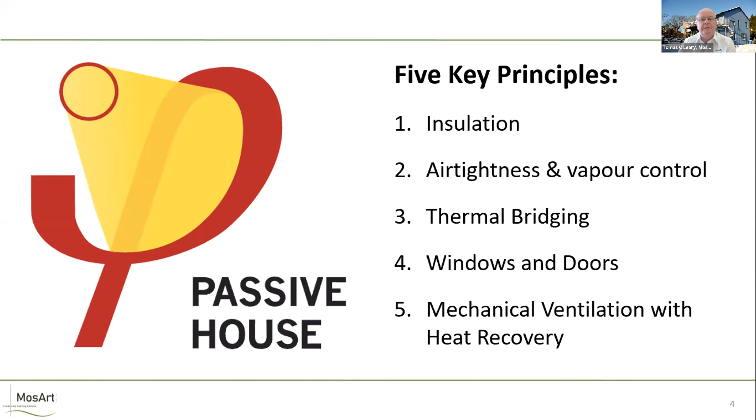So the thing I love about Passive House is the simplicity of it, quite honestly, and the fact that Passive House does the simple things extremely well. And we often talk about the 5 principles of Passive House, being insulation, air tightness and vapor control, thermal bridging, windows, and heat recovery ventilation. And really those 5 principles, if you carry those with you through your building design, whether it's new build or retrofit, whether it's residential or commercial, it'll never really set you that far wrong. And I suppose they are the bedrock of everything we do and all the projects that we work on.

So essentially, I was in Tralee. Hans Eek was talking about Passive House, and he was talking about triple glazed windows and crazy levels of air tightness that we'd never imagined before, and amazing U values. And I was just completely hooked. Basically from that day on, I just said to myself, right, I want to dedicate all my energies to this. It was like an epiphany moment for me, and something that I never looked back on. But the problem was I had absolutely no clue what I was doing, literally no clue.

I trained in UCD as a landscape architect, and I had no background in building physics. I had no background really in education. I had no background in energy modeling, thermal bridging, vapor movement, all of that kind of stuff. But nevertheless, I just jumped in with both feet and said, right, let's give it a go. There's plenty of experts out there that I can lean on. And I'll come back to that image in a little while. But I suppose the main message I want to get across this evening is, if somebody with my background can actually deliver a certified Passive House nearly 20 years ago, then really architecture technologists have no excuse nowadays, I would say.

So I was looking back over an archive of old photographs, and this is my wife, Mairead, who's on the line this evening, and our 3 children. And so we literally sold our house. We went to a conference. I came home. I was talking about Passive House. I said to my wife, Mairead, we got to build one. Can we sell our house? And she said to me, hold on a second, you want to sell our family home to build an experimental house? And I said, yeah, pretty much. And so the rest is history.

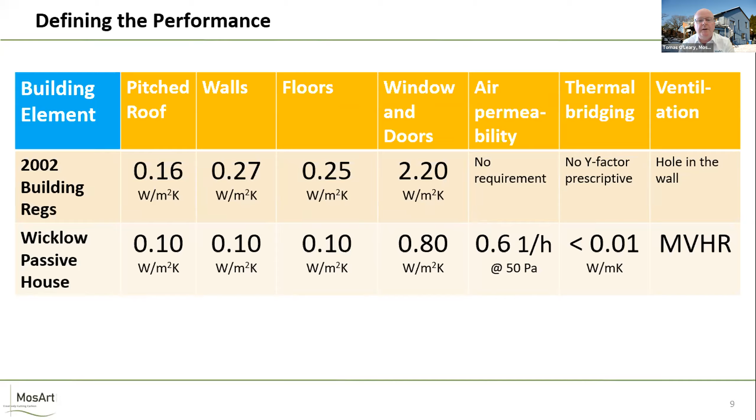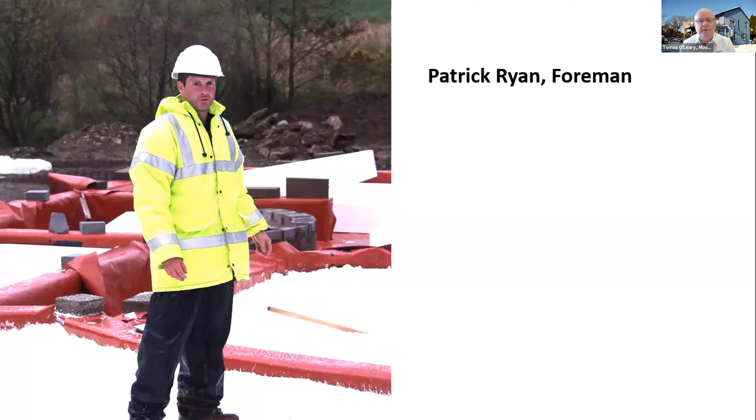Patrick was a real hero. Patrick is my wife's brother, and he came up to Wicklow for a weekend, and he's still living in Wicklow, and he was the foreman on the first certified passive house in Ireland, and really, really in the deep end. He looks like an Arctic explorer there.

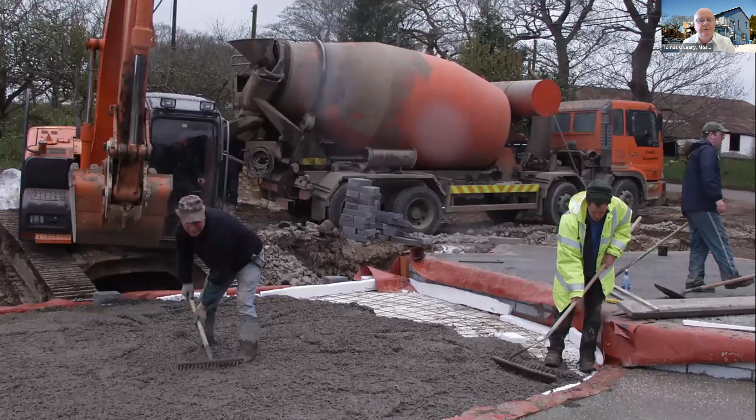I'll come back to the insulation thickness that we had in a few moments, but again, you can get a sense there of the work that was involved in this sort of level of complexity. Again, more concrete here, and all the insulation. We had 300 millimeters of insulation underneath the floor. At the time, the standard in Ireland was 50 millimeters. So we were putting in something like 6 times the thickness of insulation that was common in Ireland at the time.

And I remember ringing the insulation company, I had to beg them to give me 300 millimeters thick of insulation. They said I'm crazy. And I said, look, I know that, but I want to spend my money, can you take my money and give me the thickness I need? And so looking back on that now, it was quite crazy at the time.

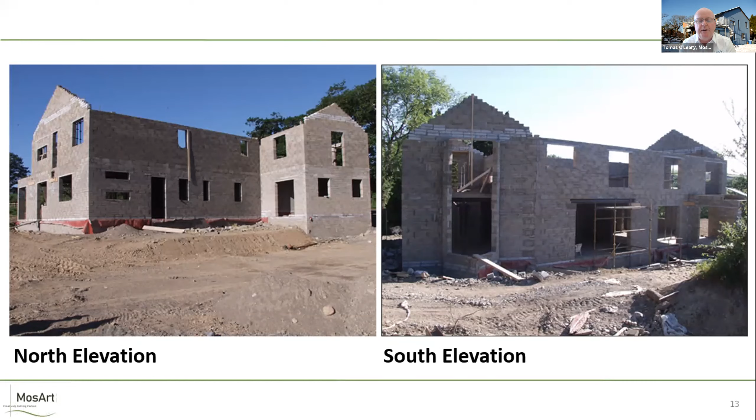You can see we used low conductivity blocks, they were called Quinn-Lite blocks at the time. And we used them not only in the floor to wall junction, but also on the gables, because this is where the line of insulation will be in the attic, and the same along here. And honestly, there were almost no construction details available at the time. I was making this up as I went along, and I look back now and feel very lucky that I happened to think about things at the right time and in the right place. But it really was a baptism of fire.

I was really quite worried about the pinch point of insulation at the eaves, and I went down to my local roof truss manufacturer, and I said to him, you know, every roof in the world has a pinch point that goes down to 4 inches.

And I need to have 12 inches of insulation here. How can I do that? And he said, that's simple. We'll just do a bobtail roof truss. I'd never heard of that, of course. And so he made a bobtail roof truss, which allowed me basically to get half a meter of insulation right out to the eaves. And again, that's not even common nowadays. Most houses still have that pinch point.

And if you've got mold in your house, it's probably going to be at the roof to wall junction. And that's principally due to that confined insulation thickness at that location. So the solutions for very, very common problems have been around for a very long time and are still not being widely used.

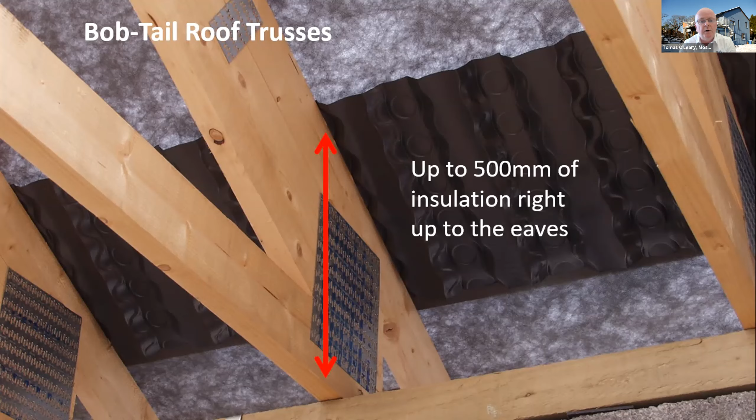This is a ventilation tray here, of course. The idea basically being that the insulation is sort of pushed out against that, but air can still get into the attic to ventilate the attic. So again, I'm looking back at these details now and I'm thinking, wow, that's kind of cool. And that was back in 2004.

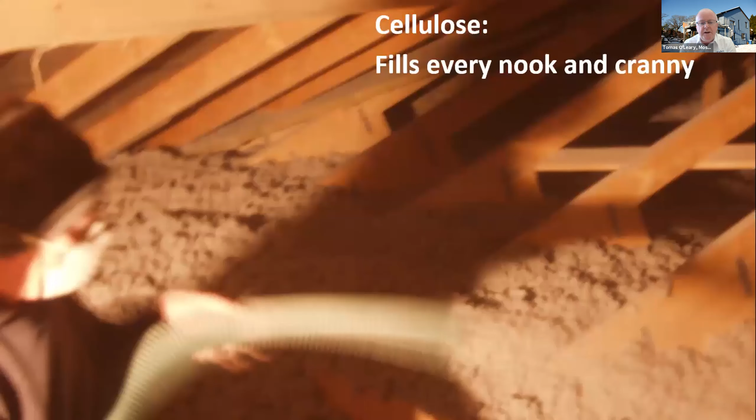Here's a very happy chap. I remember him actually, and it was kind of interesting looking back over these photos. I haven't seen these photographs since whenever, but we decided to use cellulose insulation in the attic. I don't know where we got that idea from, but I like the idea of it being made from paper. It's recyclable and it's so easy to install, because basically you have one guy down in the truck. So he's the guy who's got the good job, and he's the guy who's maybe got the less pleasant job.

And this is up in the attic now, and there's a guy basically there with a fire hose, and he's just spraying the cellulose insulation everywhere. And it flows like water. So you're not up in the attic with a knife or with a saw cutting insulation rolls, getting all itchy and all of those kind of problems. So that was just a pure fluke.

I sort of thought to myself, wouldn't it be interesting to use cellulose insulation? And to be honest, we were using a lot of petroleum-based insulation like polystyrene, and I wanted to use something that was a bit more natural and a bit easier to use in the roof. And that was a really good thing. I would highly recommend that, cellulose insulation.

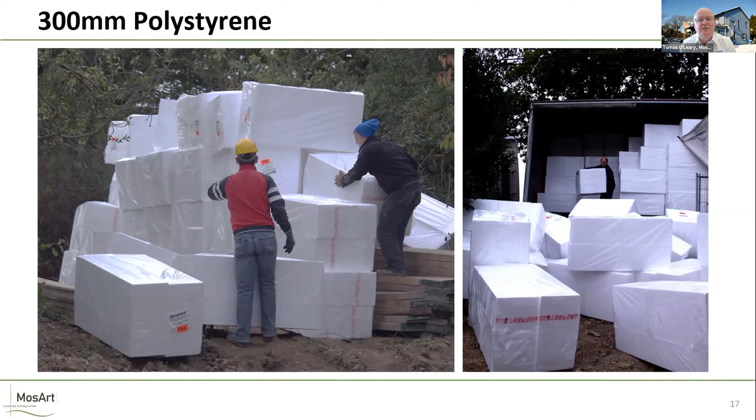So Aerobord had never been asked for 300 millimeter thick polystyrene before. And the guy actually spent 20 minutes trying to talk me out of it. And I was saying to him, hold on a second, I'm trying to buy 6 times the amount of insulation that somebody normally buys. Why don't you sell it to me? So he eventually sold it to me.

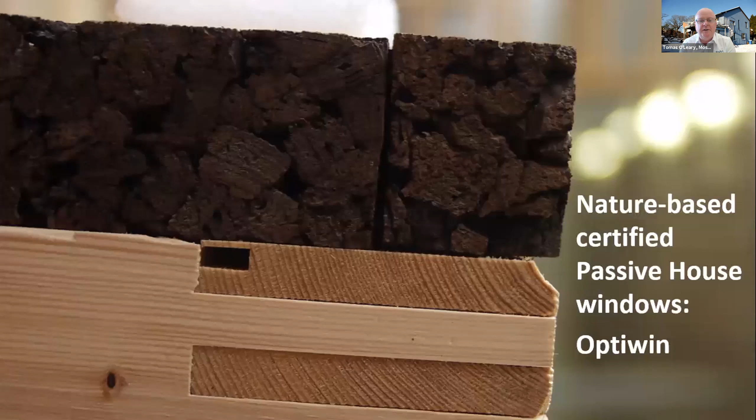The windows are really quite cool. Again, I was trying to use as many nature-based products as possible. And the windows are made by a company in Austria called OptiWin. In fact, the windows were designed by the gentleman on the previous slide, Franz Frundorfer. And so they're wooden windows, but for insulation, they use this Portuguese cork. And that was quite an amazing innovation to me, that you could actually use cork to insulate window frames. And again, I love that photograph to show that.

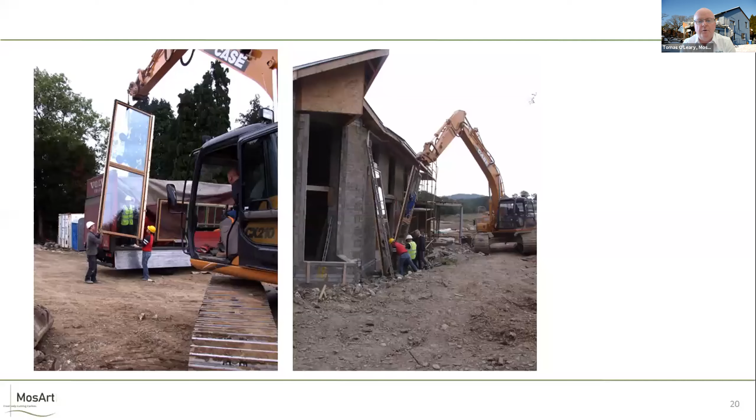Some of the windows were, or are, I should say, they're still in the house, really enormous. And you can see the house starting to come together here now. And thankfully, the window manufacturer sent 2 installers over from Austria, because again, we were just a bunch of Irish guys and we really didn't know what we were doing. I hope Patrick doesn't mind me saying that.

But anyway, you can start to see the house coming together here. This window here is 5 meters long, and it's about 2.5 meters high. And that was probably the most nervous day up on site for me, because the digger driver that day was probably hung over. We're probably the only place in the world where you would use a 20-ton digger to install a 5-meter long passive house window. And you can see the Portuguese cork here in the window frame.

So the U value is around 0.8 combined U value, and with a G value of around 0.62 if you're interested. And that window, you can sit in front of that window. It can be -5 degrees outside, and you can sit there in your shirt and feel very, very good comfort. The physics behind these high performance windows is really something.

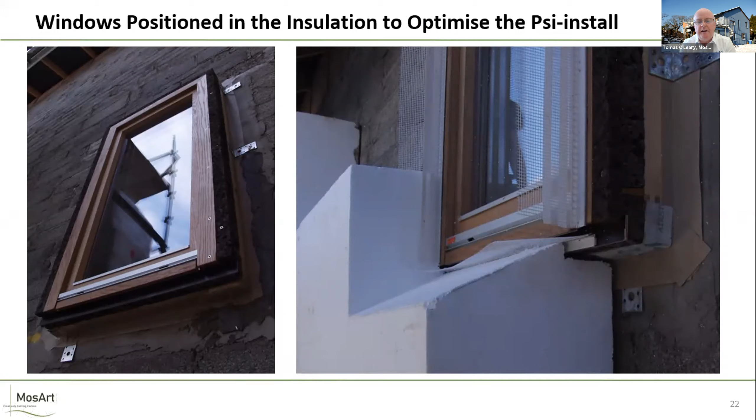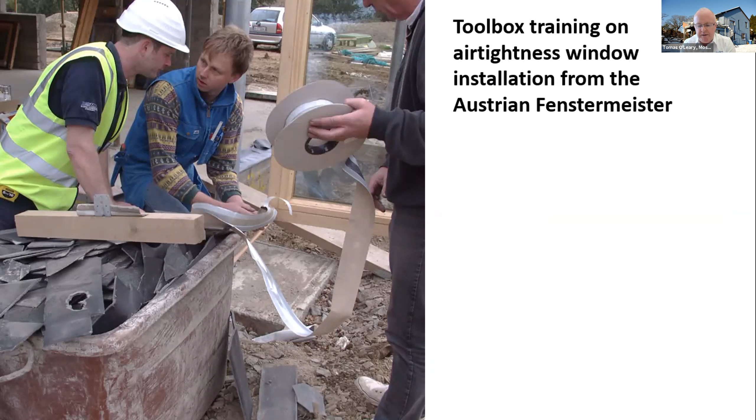One of my favorite photographs here, this is this guy here in the blue. His job title is Fenstermeister. That's actually a job title in Austria. And you don't have to be a genius to work out that he's a master of windows. And he's teaching Patrick about airtightness. And I love this photograph because still to this day, we're still doing this job of trying to educate people about airtightness and trying to reduce losses through drafts and so forth. And this photograph is 17 years old now, and it brings back good memories.

The airtightness was a big challenge for us. I won't lie to you. There wasn't the same knowledge, there wasn't the same selection of materials, and we basically weren't experts at it. But we got there in the end after a few tests, and nowadays we find it much, much easier. In fact, we're getting very, very good results on passive house projects now without much effort.

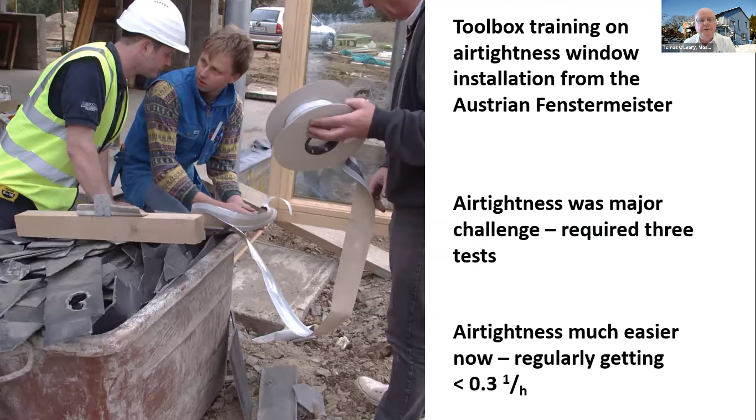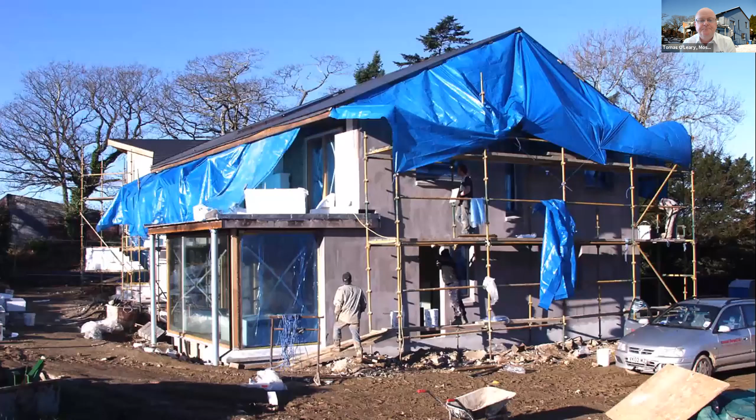A little bit further on now, all the insulation is on. And one of the things I didn't really like about the external insulation, perhaps it's different nowadays, but if the weather is really bad, very wet, very rainy, it's not the most stable of systems. At least it wasn't back then. So we had to basically almost put a circus tent over the whole house to protect it as we were doing the plastering. In any event, it turned out fine. It was great.

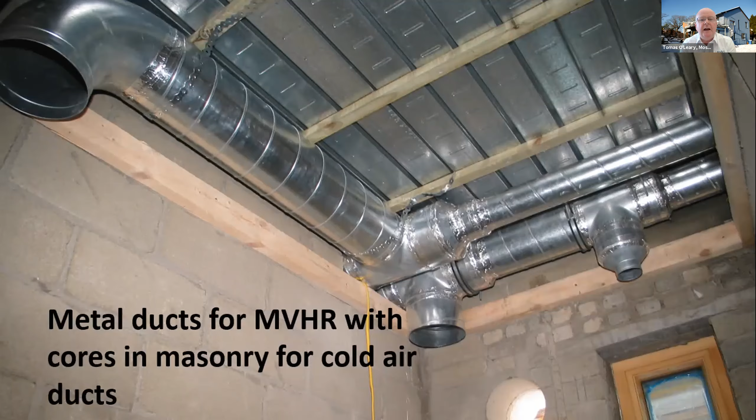I don't know if anybody was listening to the 6-1 news today. They were talking about air quality, we need air changes, and I'm thinking, Passive House has been doing this for 30 years. This is not a new idea to have mechanical ventilation and filtered air. They were talking about we should filter the air, and I was screaming at the radio saying, hello, we've been doing that for ages.

Quite a bit further on, one of the big things is about shading. You've got to make sure that if you have a lot of south-facing windows, you don't end up with an overheating issue. And Mairead and I, we couldn't afford this balcony when we first moved in.

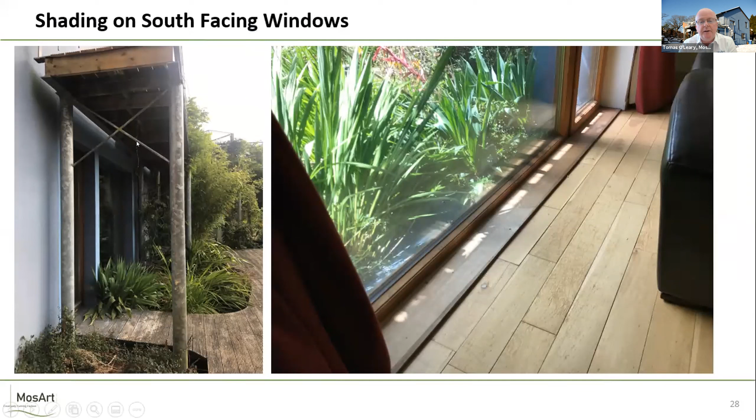So for the first 2 summers, we didn't have this balcony, and the house did overheat. So it was a really good experience for us. And look at this, I love this photograph here as well. So this photograph was taken at 12 noon on the longest day of the year. So basically when the sun is at its highest, and you can see the shadow line there just at the window.

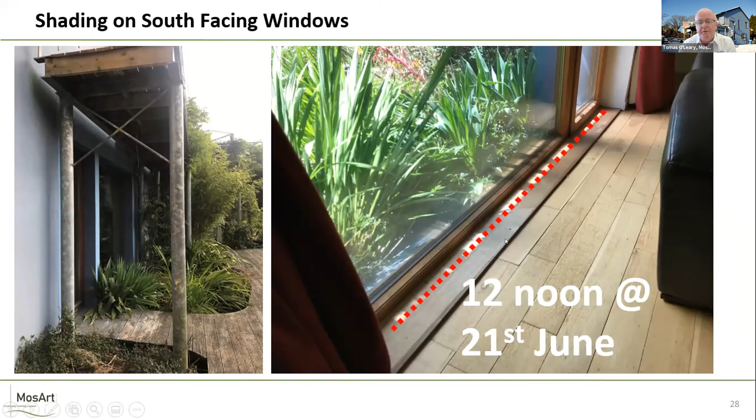So again, this is me not knowing what I was doing. I just looked up on Google, found out what the angle of the sun was, did a bit of trigonometry and worked out how deep the balcony needed to be, and it works perfect. It's like Newgrange, and we're kind of so happy with that. One of the main benefits of a balcony as well is you can start to grow your own grapes.

And with my background as a landscape architect, one of the things I really love about the house, to be honest, is the garden. You can hear that in my voice, and it's just so beautiful to look out at the grapes every year in the autumn as the leaves are starting to turn. And there's not a day goes by that I don't pinch myself saying, how in the name of goodness did I end up living in such an amazing house?

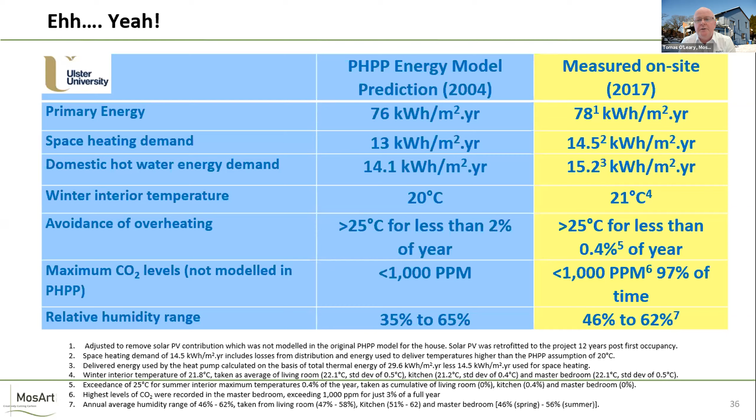And we modeled this in 2004, and it was monitored 13 years later. If you look at all the numbers there, it's just like boom, boom, boom, boom, boom. And again, this was done by somebody who really had absolutely no idea what he was doing. So again, I would say to you, what's your excuse? That's kind of my challenge, I suppose, for this evening.

So what would I do differently? There's a number of things I would do differently. I just want to focus on the first three, if you don't mind.

Embodied energy is starting to become a big discussion. Historically, Passive House has been very focused on operational energy, but Passive House and the Passive House Institute are moving very rapidly now to embodied energy. I'm going to talk about domestic hot water very quickly, and then also off-site construction.

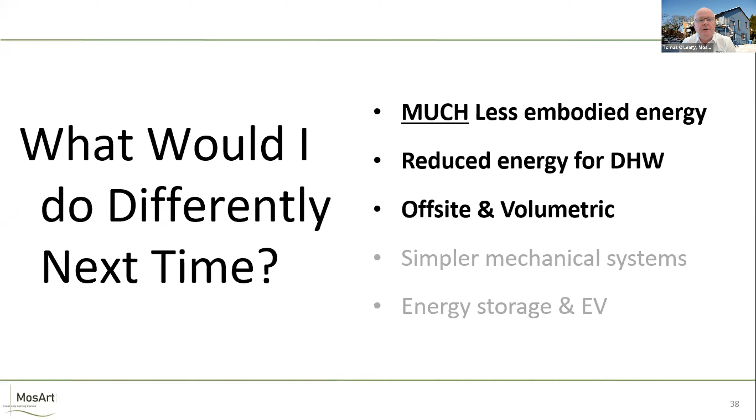So wood is actually 50% carbon and 42% oxygen. It's practically made from air. Well, we know it's made from air. You could eat it if you were really, really starving and your teeth were in good condition. So we should be building more with wood.

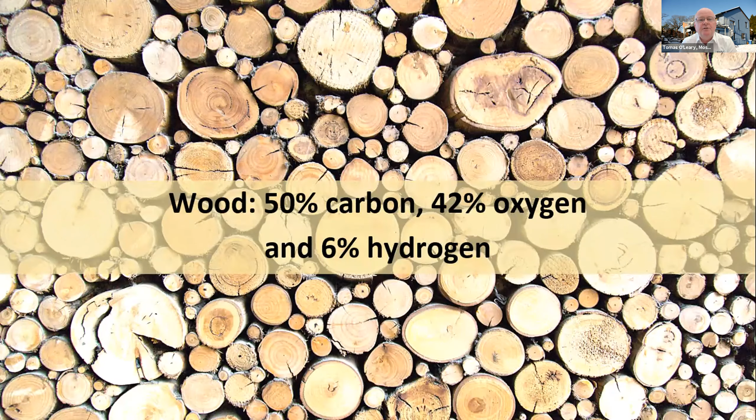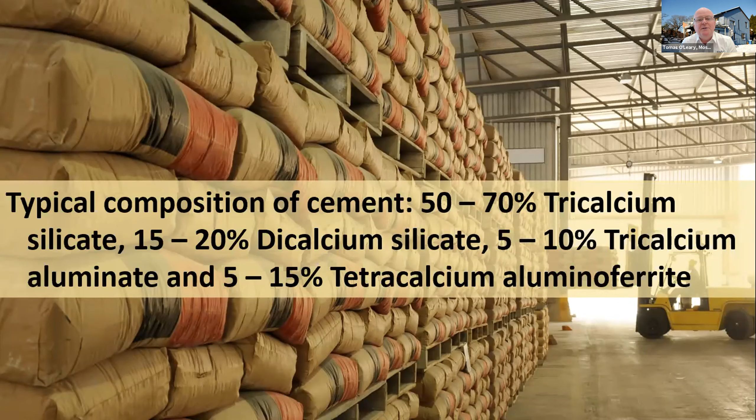Cement, on the other hand, if anybody can pronounce any word on this, apart from the words typical composition of cement, I'm going to give you a chocolate bar. If you can't pronounce it, I'm sort of of the opinion it could be a bit dodgy. Now, there are good cements and there are kind of poorer cements, but look at the amount of cement and concrete we used in that house, and I would certainly like to use less in the future. And the Passive House Institute have been advancing on this quite a lot.

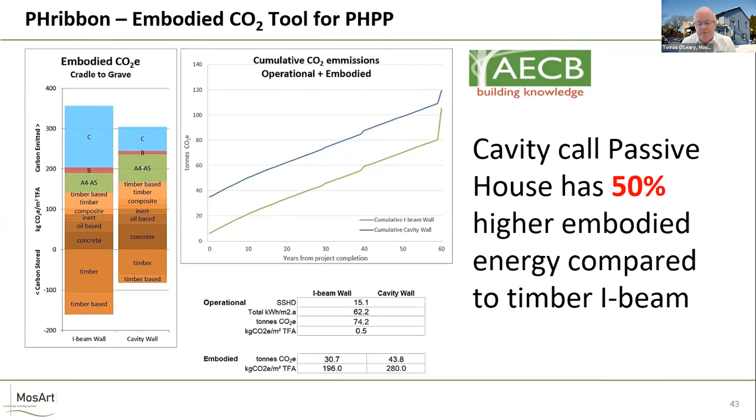So we've got to start moving in the direction of low embodied energy. And in our firm in MosArt, we're very, very focused on that now. I have to admit, I don't mind saying it really wasn't on my radar, quite honestly, back in 2004, but it very much is now.

Now, what about showering? No amount of airtightness or thermal bridging or insulation or windows can do anything about the domestic hot water that we consume. We have 5 adults in our house, a dog and 2 cats. And the 5 adults, between us, we reckon we take about 1,250 showers a year. That's not me personally now, that's spread across the whole family. And so it's a huge amount of energy.

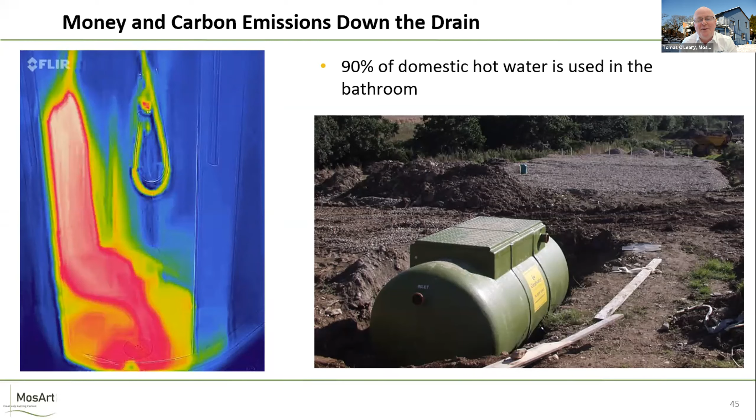And here's a photograph of my septic tank that I found today when I was searching back through the archives. So those 1,250 showers that my family takes, all that hot water is going literally down the drain. I can't tell you how frustrating it is. So, conscious that my wife is on the line here, if I was going to build another passive house, I would definitely have one of these things in it.

So there's several drain water heat recovery systems available now, and the Passive House Institute are certifying those, and some of them are really, really efficient. This one here will actually reduce the energy demand for showers or for domestic hot water by nearly two thirds. I've no doubt in the world, at some point, these are going to be as standard as dishwashers and washing machines. We've really got to stop pouring all that hot water down the drain. We just simply can't continue that.

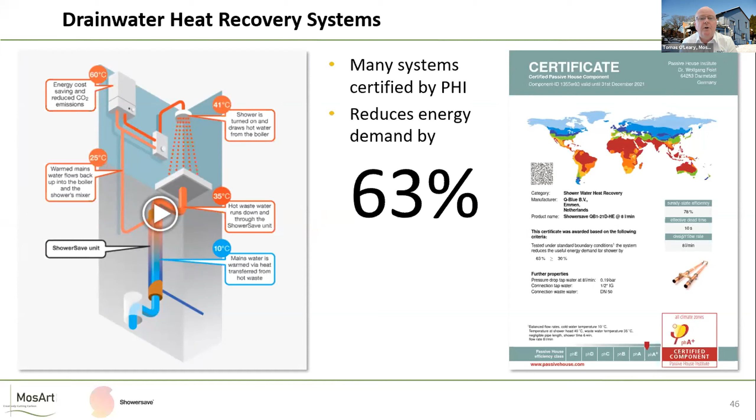And it's something that most people aren't aware of. I would say to everybody on the line here tonight, the next time you take a shower, I want you to look at the drain and imagine where all that hot water is going. So that's something maybe for everybody to think about.

So we do a lot of work in the States, as Simon introduced, and especially in New York. And the Empire State Building is a building that fascinates me. And something that you may not know is it's 103 stories high. It took just 1 year to build that building. Can you imagine that? 1 year to build the Empire State Building, 1 year and 45 days. And there must have been thousands and thousands of workers on it.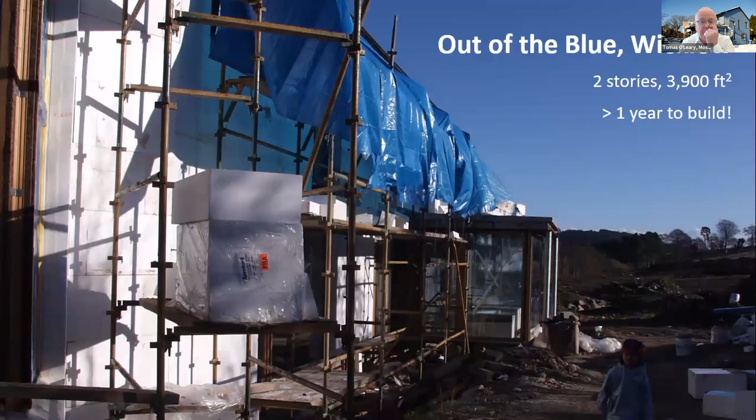So this is our house, this is Out of the Blue, and this actually took longer to build than the Empire State Building. That's quite a statement of fact, isn't it? And it's only 2 stories, it's not 102 stories. And okay, it's a big house, 3,900 square feet. So it took an enormous length of time. We actually sold our house and we had to rent our house from the guy who bought it because our house took so long to build.

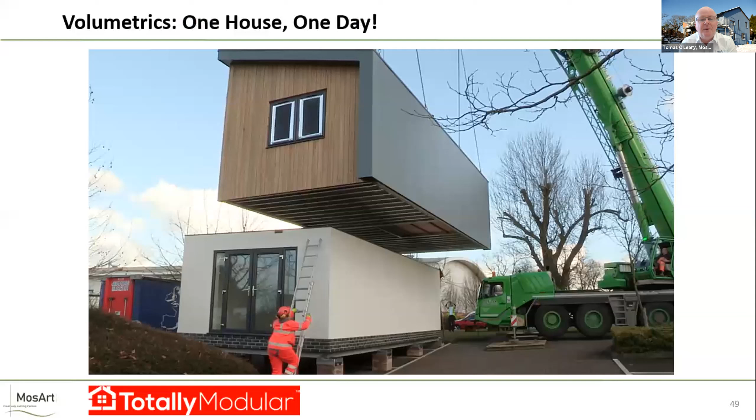So one of the things I'm really excited about is volumetrics. And volumetrics is basically where your house arrives sort of in parts, if you will. And this is a company based in the UK, Totally Modular. And volumetrics is very much avant-garde now. A lot of people are talking about it. And okay, obviously they're spending time in the factory assembling this house, but at least you're not on site for a year looking at this house being built.

So these are things that I would do differently, and maybe in the chat there's some questions, and maybe we could have a discussion about other things as well. There's a million things I would do differently, but I just wanted to highlight those.

And we were under pressure, Art, my business partner and I, we were really under pressure. What are we going to do? How are we going to survive? We had a little bit of knowledge, where would we go with that knowledge? We could go to the UK, we could go to Europe, we could go to the US. And we decided to go to the US, and we set up a company there called Passive House Academy.

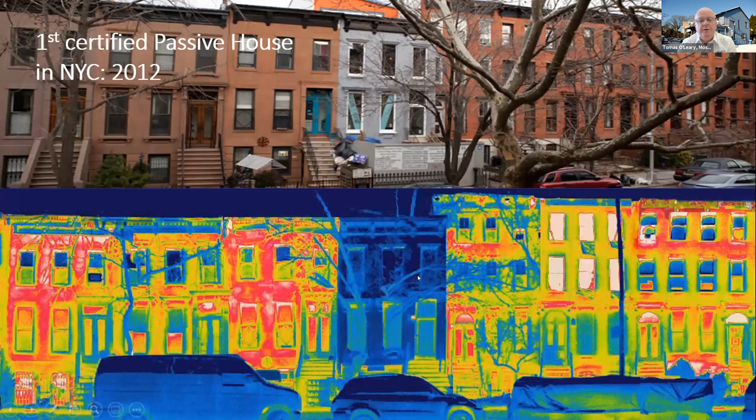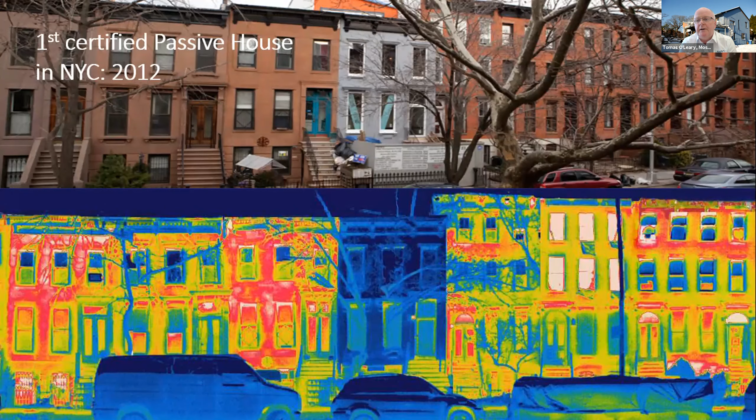And no prizes for guessing which is the passive house building on this street here. This photograph was from McAfee. And essentially, that was our first real project. This is a 200-year-old Brooklyn brownstone retrofit. And all of a sudden, we were doing retrofits on buildings in historical districts with no problem.

Next thing we know, we're working on this project here. Deborah Moelis from Handel Architects was the architect for this. She was a student of ours, so we were running training programs in New York City. And our business model basically was, if we share our learning, if we run training programs, maybe we might pick up some consulting along the way. And that turned out to be a good business model.

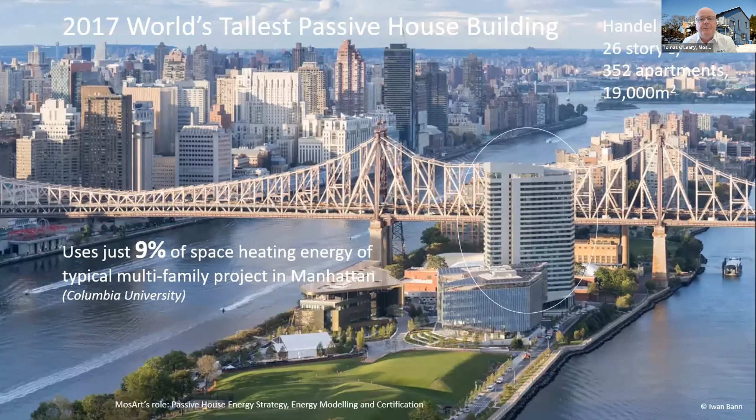So this was, at the time, the tallest passive house building in the world. And again, it's just an incredible dream to come across that. And myself and Deborah there at the top of the building looking down over the East River.

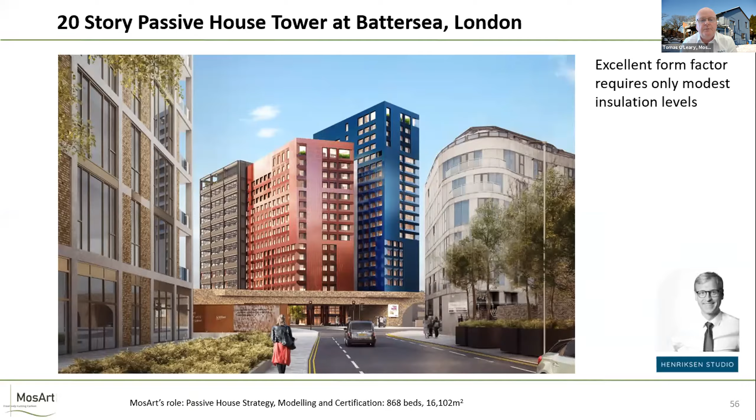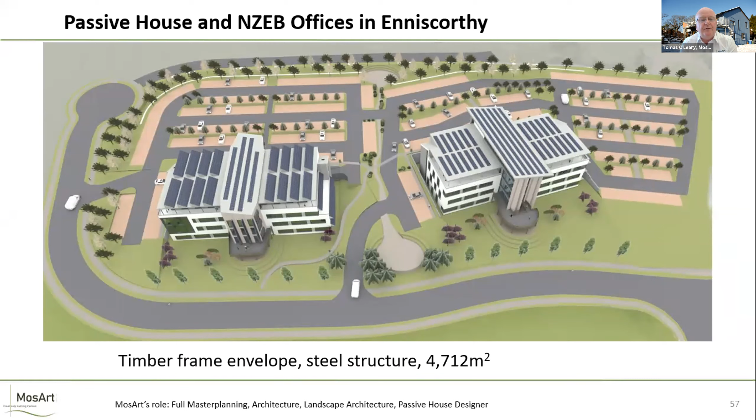Henriksen Studio also got us involved in this project, slightly smaller, in Battersea. And again, that's a 20-story 4-tower project as well. Some offices, we're doing a lot of commercial work as well. These buildings are designed by my own office, by MosArt, and delighted to say that they're going to have a timber skin. So they'll be certified passive house. Barry McCarran knows this project very well. This is about to be certified in the very near future.

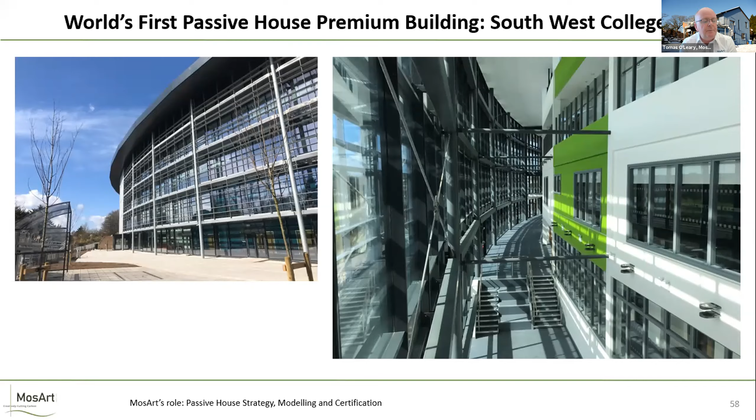So we're the certifiers of this building. This is a ridiculously beautiful building in Enniskillen. 200 meters long, 5 stories high, just absolutely beautiful. And this is the kind of scale of projects that are now being built to the passive house standard.

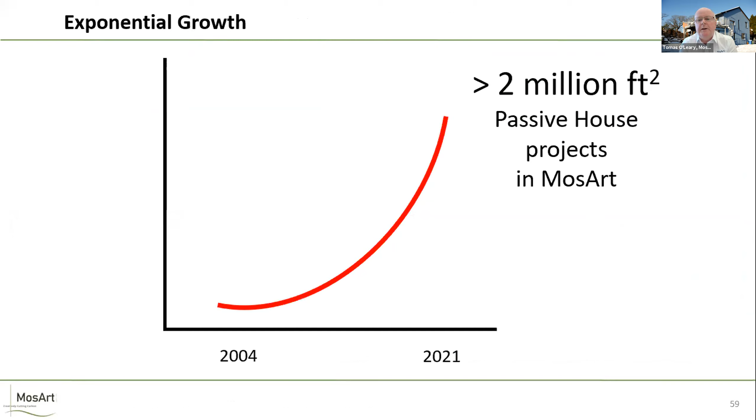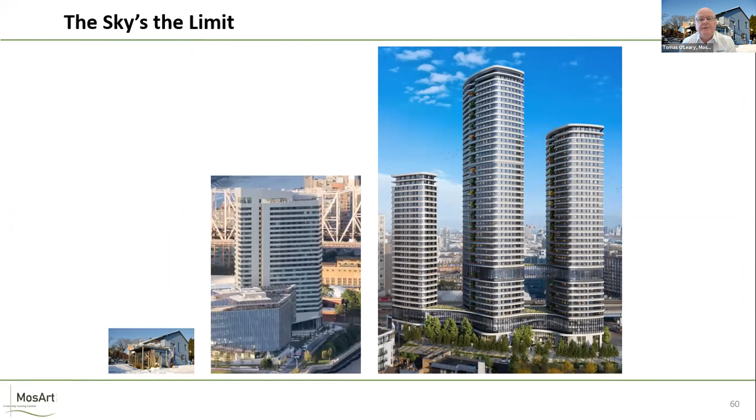So we started off quite by accident getting involved in passive house in 2004. And we've now done about 2 million square feet of passive house projects, and we had no intention of getting involved in passive house. We started off on a little single family house project, and now we're doing some wonderful projects. So feeling extremely grateful to just be involved in this. I feel like an accidental tourist at times, but really quite happy.

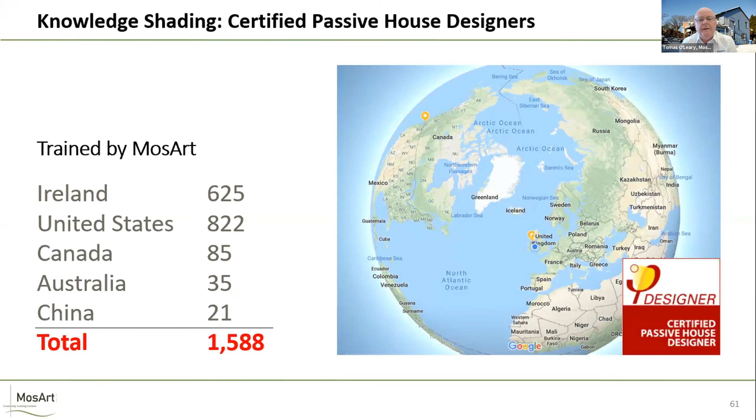We do a lot of education around the world as well. One of the things I'm really passionate about is education and training of architects. We've trained over 1,500 certified passive house designers. We've delivered that course in Melbourne and Beijing, all over the US, in Vancouver, obviously in Ireland as well. We've trained a lot of architects, a lot of designers, and that's something I'm very proud of as well.

Also locally, we give guided tours to the local school kids who are doing construction studies, so they can get some inspiration as well. So it's kind of nice to give something back to the local community.